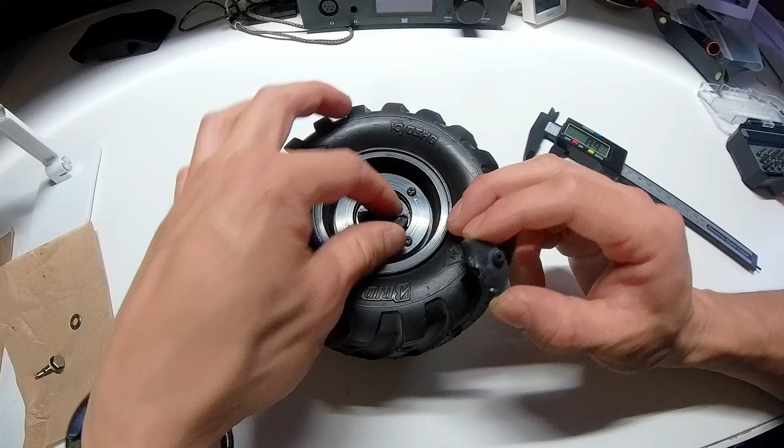I'm just gonna take some measurements of this wheel hex, and I'm still learning. I'm just starting to do some 3D printing and modeling, so I'm not a professional. But here's just a quick way how I do things.

So I'm just going to take out the outer diameter, around 28.4. Doesn't have to be that exact because there's some space in between each side. From what I remember, there's a plus or minus 0.2 millimeter difference for my printer. So I'm just going to put 28.4 in the computer so I can keep track of it.

And then for the width of the pin, I'm just going to do the width here and see the difference. So 12.2 versus the actual pin size is 12. So I can probably print the shaft to be 12.2, because if I do it exactly 12 like this pin, the hole might not fit it perfectly because you need some space for it to move around. And for a prototype, I don't want to make it too tight, and you can always adjust it later.

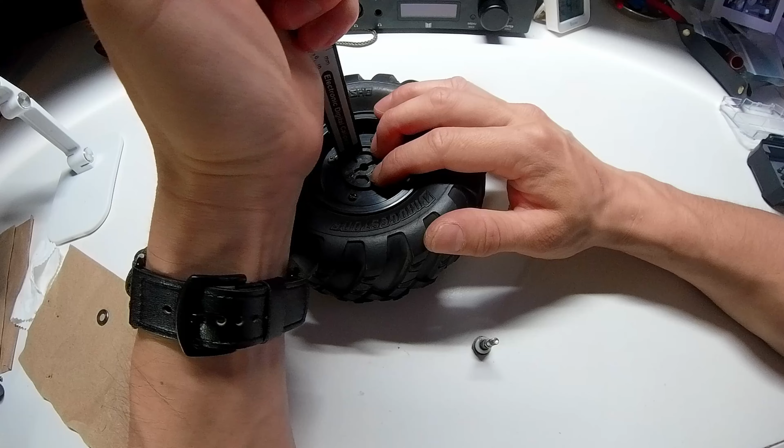And then now I gotta do the thickness. I'll use this part of the caliper at the bottom end just to check the depth. The depth is around 2.2, 2.4, and 2.4 is the depth. And then I'll check the actual thickness of this. It's actually 5, so if I do this here instead, yeah, it's around 5. So let's do 5 for thickness of the wheel hex.

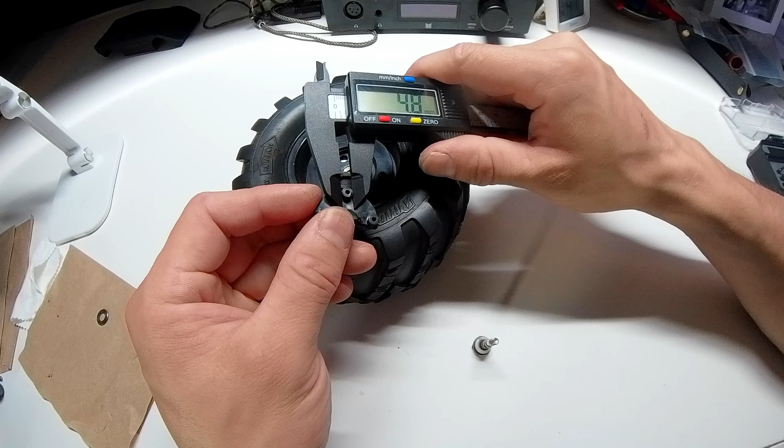In each individual wheel hex, I mean the legs, I don't know what to call them, but the attachment point to the wheel, let's measure that as well. This is the height of those 4 attaching points, so I would say 3.2. And then the width, the diameter, not the radius - the diameter is 4.7, so 4.7.

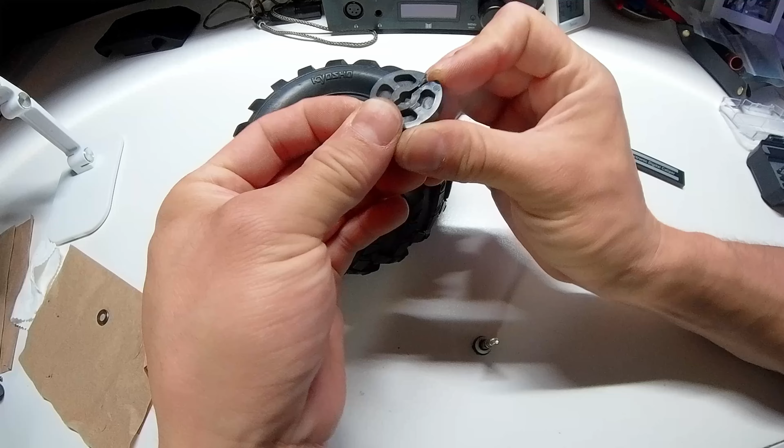So all these numbers are just estimates, and I think that's pretty much what I needed for this piece here. And I think I just need one more thing: how deep is the shaft?

Because it doesn't go all the way through for the center shaft, let me take the thickness of this. It's 2.3, so it's 2.3, 2.4 millimeter deep for this shaft. 2.4 deep.

So after all those are done, I used to use Fusion 360 when I was a student, and they have a 1 year free trial or subscription. So I used it for a little bit, but I wasn't studying 3D design or anything, it was just using that student benefit, like what I said about other benefits before. You gotta ask, and then you get it, and if you don't, then it's your own loss.

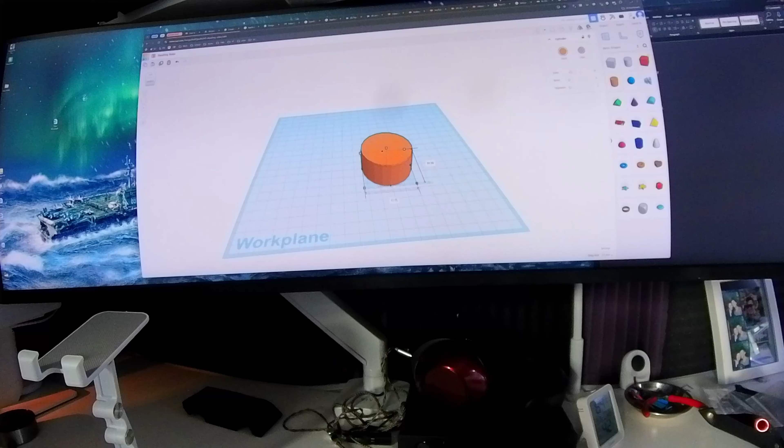And next, now I'm going back up here to my monitor, to my screen. I don't know if you can see it, let me turn on my lights now. So now I made some measurements of the wheel, and now I'm gonna go to Tinkercad. This is the free version, so most basic.

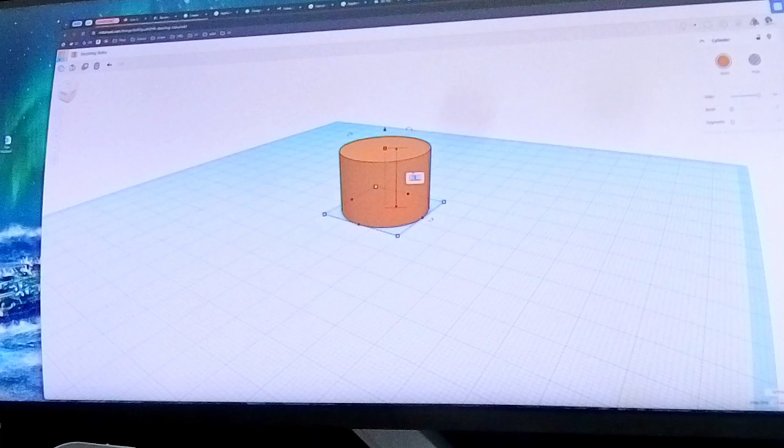I'm just gonna do a circle, 28.4 diameter on both, and then for the sides, it looks all rough, not like a smooth circle, and then we just do the sides and make it smooth as much as possible. Now it's like a smooth surface, and the thickness of this is 5.

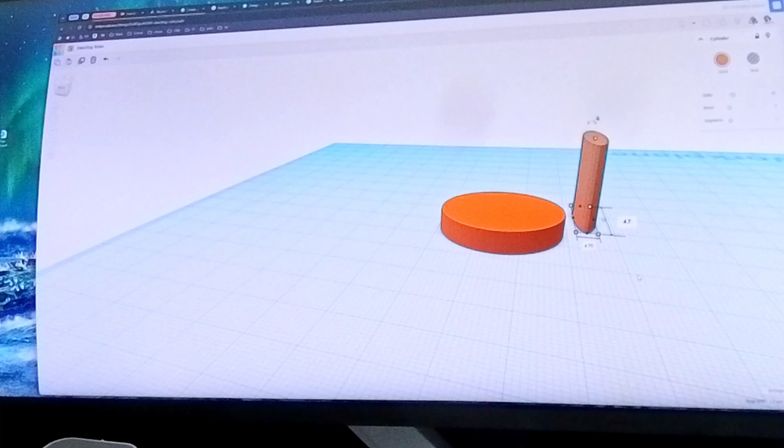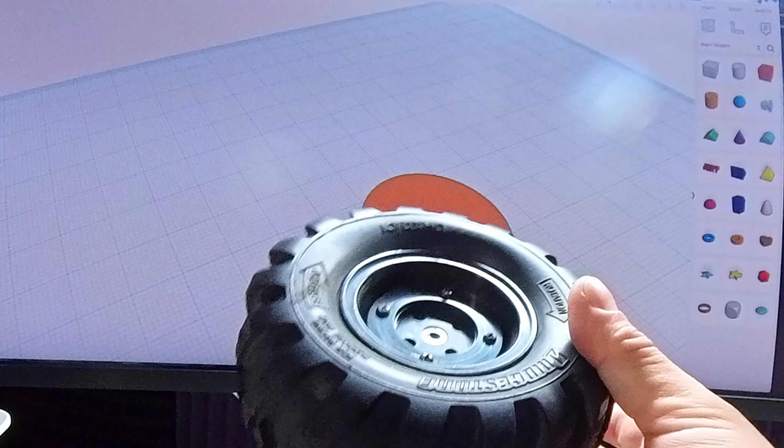So now you have this piece. It's pretty simple. And on top of that, you have to make 4 of those little legs, and I would just do 4 of those, same thing. And those legs are 4.7 by 4.7, and then the height is 3.2, and there you go, 3.2 height.

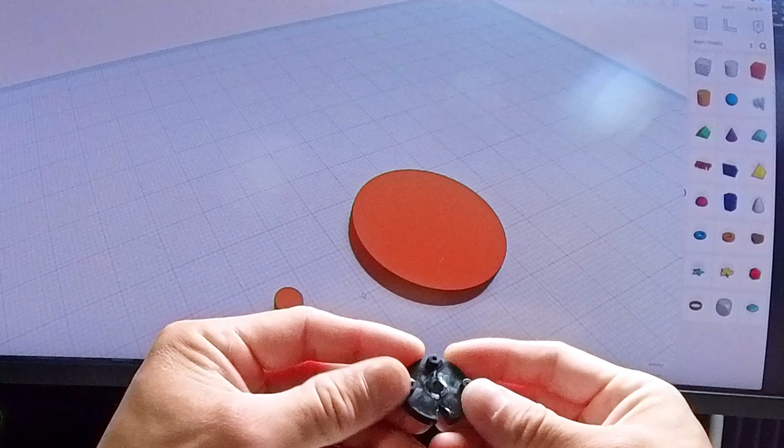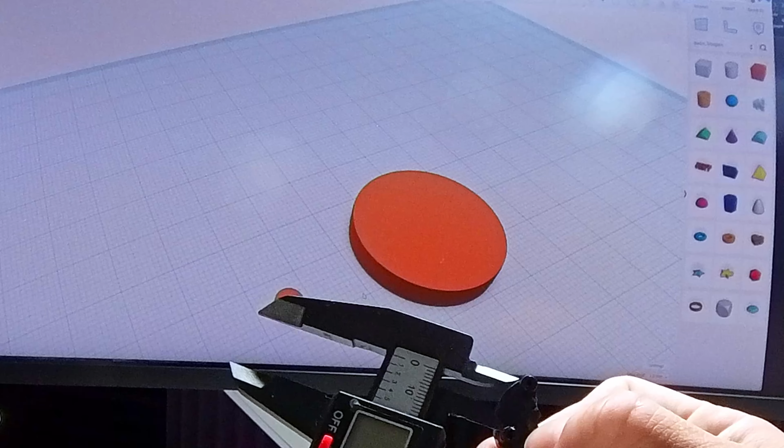And I think one thing I forgot to measure is, let me bring this back up, because now you need 4 of those, but where do you place them? So now I need to measure the distance for those legs. They are not perfectly on the corner. So I gotta take the original piece and measure how far off they are from each corner, because they're right at the corner, so you don't have to measure the space, but you can measure this distance.

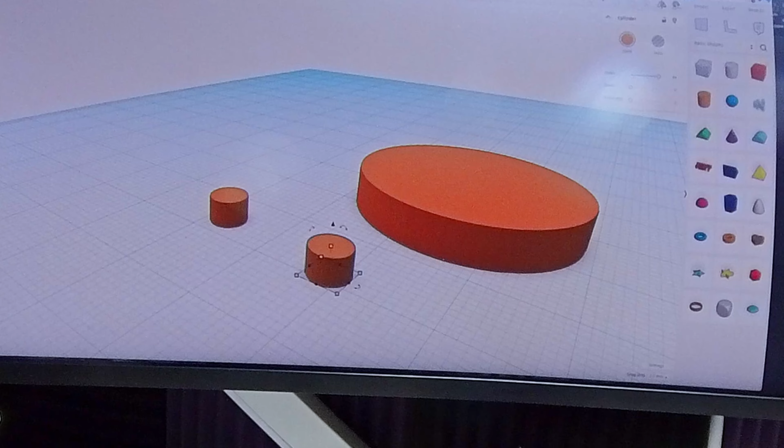Distance, center, I guess space is sufficient enough. Center to center, it's around 17. So I would say 17, center of the hole. Okay, so you can do that. But first, let's make sure I got this right. 4.7, yeah. So sometimes in the software they look pretty big, but they're not.

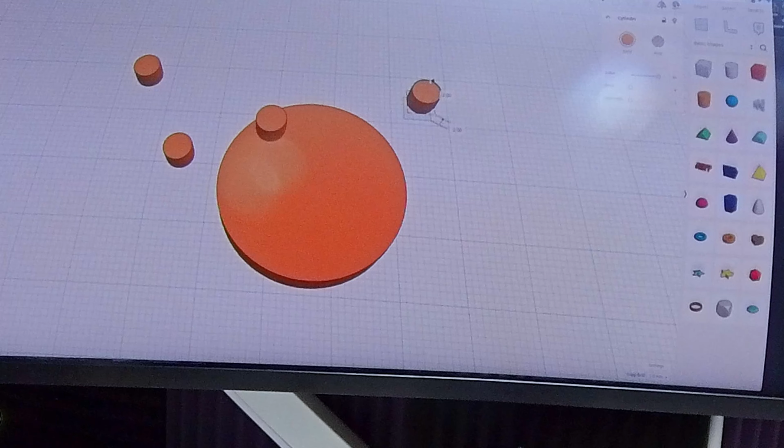So you need to make 4 of those. Control D, and 4 of those. I'm not very good at this, but you make 4 of those. And I think there's a better way to do it. If I put it at like 17. And you raise it. What is the thickness of this? 5, and then you raise it by 5. So now you can move this over here at one corner.

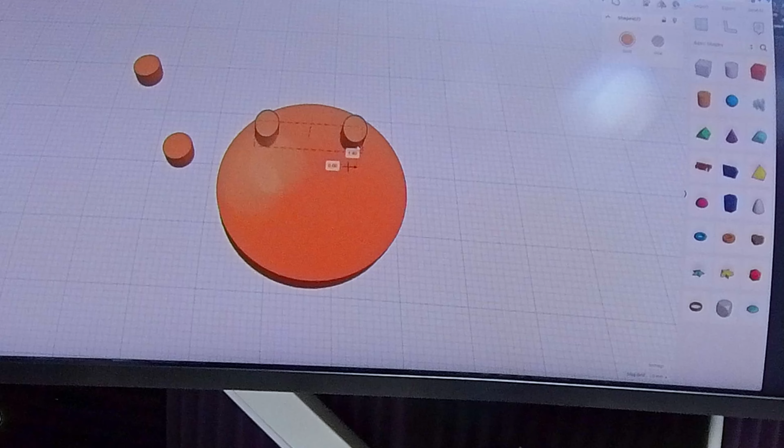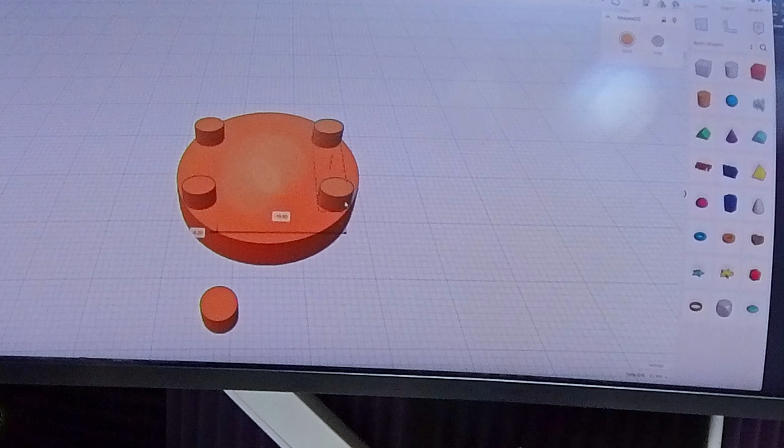And then you have to use a ruler to measure the distance to make it 17. Let's do 5 on this one too. So we just gotta make sure they're one end to one end. They're 17. They're not 17. See? Let's put 17. And then I think if you drag it on top, that's pretty much where you need to put it. Just align it to the edge.

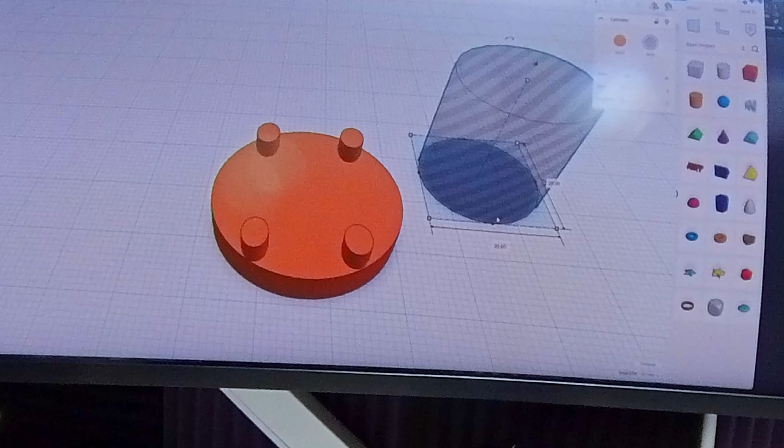We're at 1 millimeter per move. So I'm sure there's a better way to do this, but now let me do these 2 objects together. Control D, and then just line them over here. See, there you go. Now you have 2 of the same thing. And can delete those two. And now, looking pretty good. So now we have to cut a hole in the center, which is the shaft.

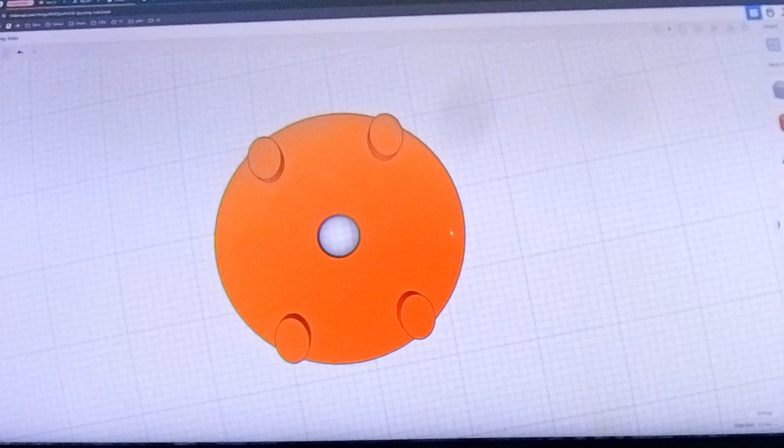It's 4.8, so we make it 5mm so it will have some space to move. 5 and 5. Lengthwise doesn't really matter. Let's combine those shapes first, done. And then I want to center these two pieces on those points. Now the shaft is right in the middle, make sure it's completely smooth too. And now you combine them again. So now you have a hole in the center for the axle.

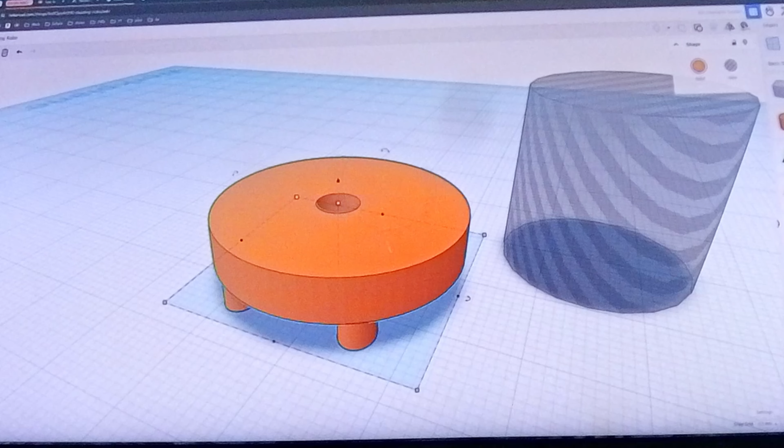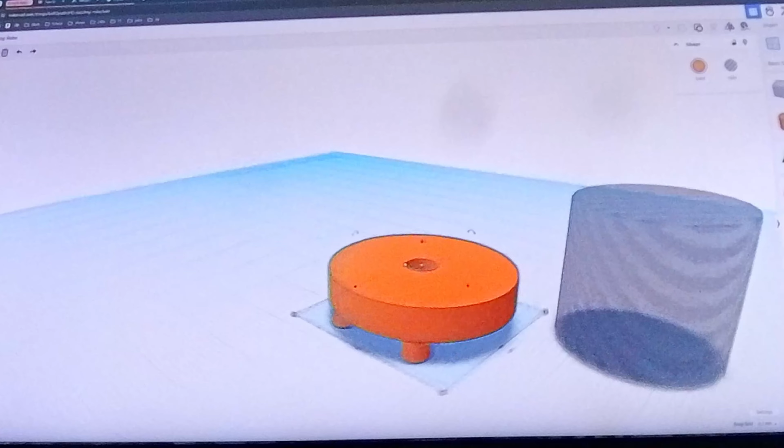Now we can turn this over 180. Now it's upside down. So now what we need to do is the cross shaft that goes into it. Wait, let me do this 180 again. I don't know if I made the heights of those legs correctly. Separate them completely. What's the height of this? Oh, that's correct. Never mind. So I went back and reversed it. Now it's back to the bottom end.

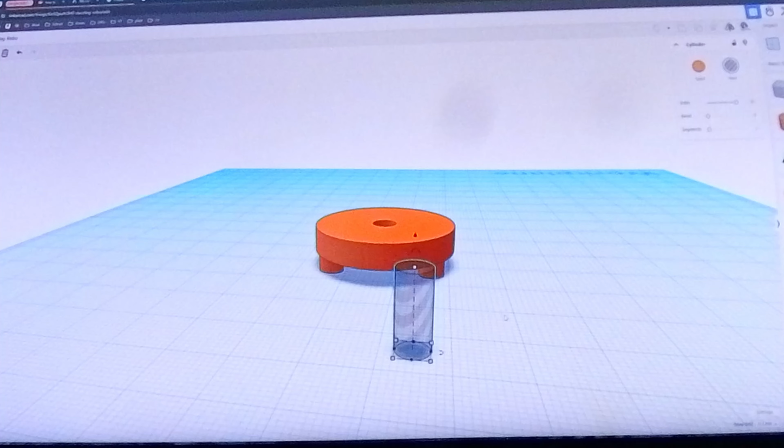So now let's focus on this piece. Make sure it is completely rounded out right here. The thickness of the shaft is 5, and the width is 12.2. Let's measure the actual piece first. Thickness is 2, so let's do 2.2. Width is 12. Let's do 12.1. Give you some space.

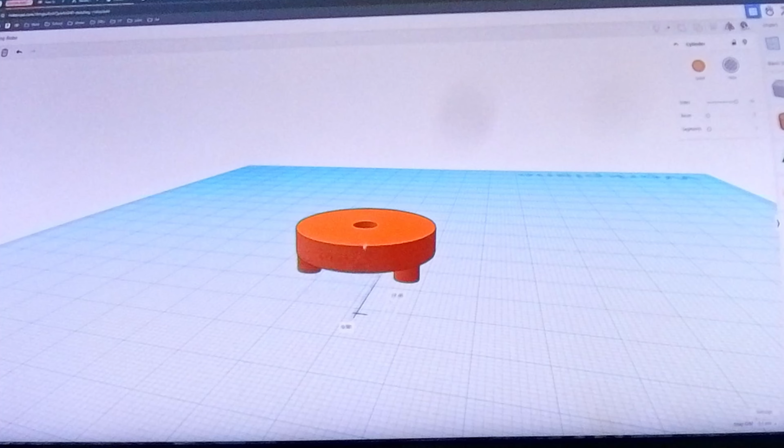Thickness is actual thickness. This is 2, so we make it 2.2. Width is 12.1, and that's pretty much it. And then we rotate it at 90 degrees.

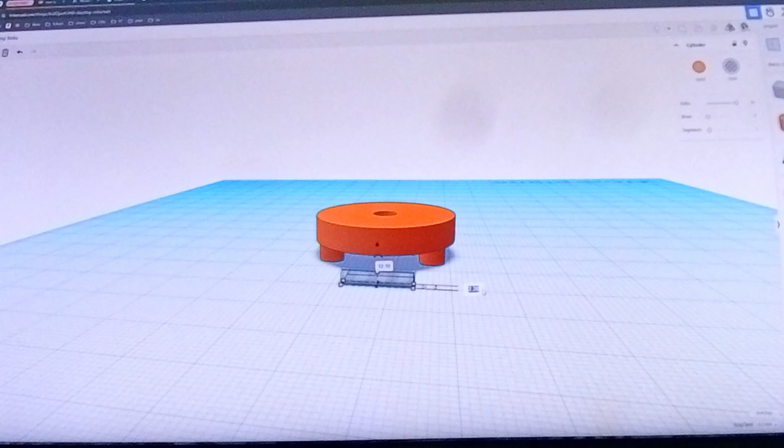And what's the height of this? The height is at 8... from this is 8.2, ground 2. So I just have to make sure. So this is at ground level. 8.2 is the actual height of the surface, and I need it to be 2.4mm deep.

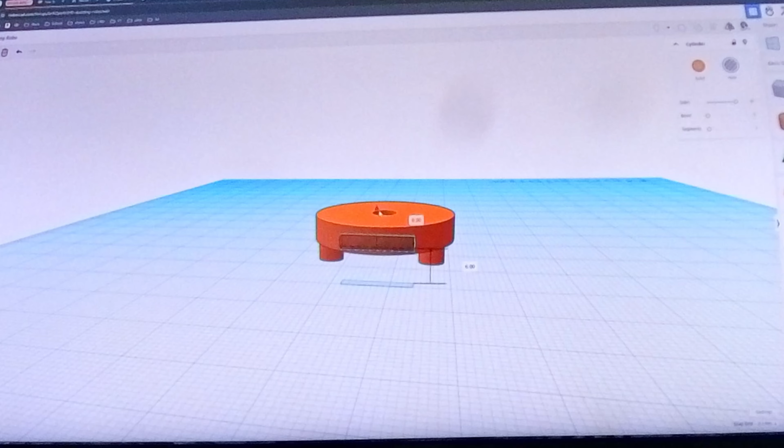So what I need to do is 8.4 minus 2.4, which is 6. No, 8.2, never mind, 8.2, not 8.4. Minus 2.4 is 5.8. So it has to be at 5.8 height. So I'm going to raise it by 5.8.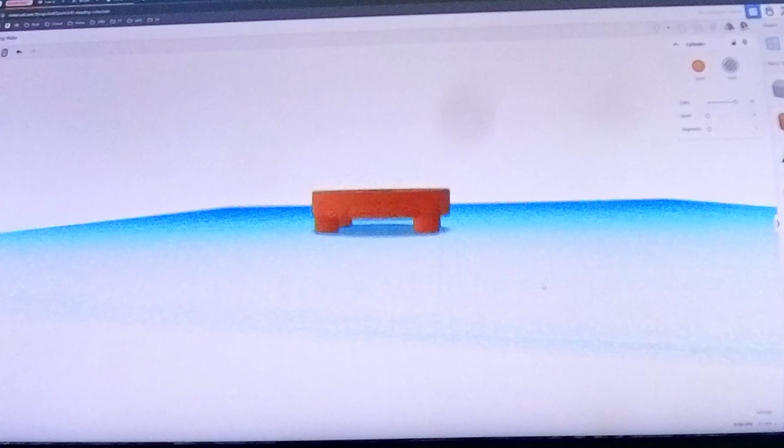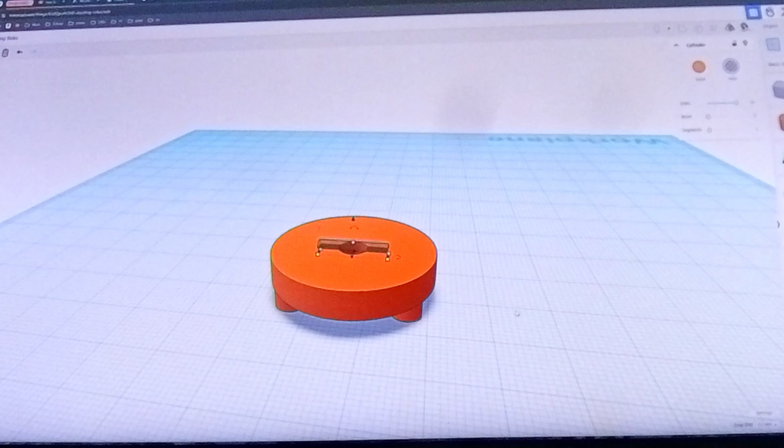And I can actually do it a little deeper just to be safe, because if it's too shallow, it might come out. So 8.2, 5.8, let's do 5.7, and it'll be a little deeper. And then now I'm just gonna align it with the center. So center, those 2 points. It feels like it's not showing up on the surface.

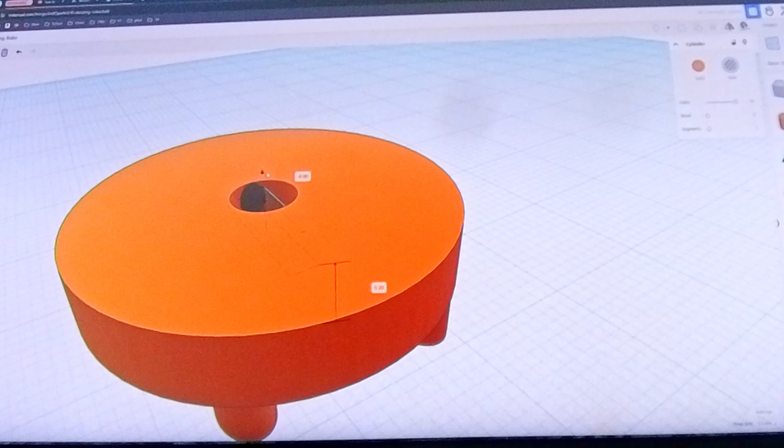Oh, I just remembered, the shaft, is it rounded? Actually, the top half is not, only the bottom half is rounded, so we can just do pretty much half of this. And we can do it a little thicker, like 3, then I can bring this down a little bit lower. So to do the proper math, you have to make it level. And if I do 3 and going down,

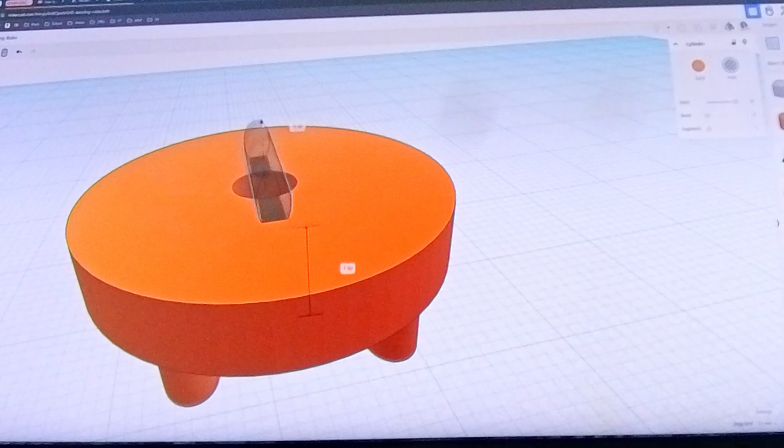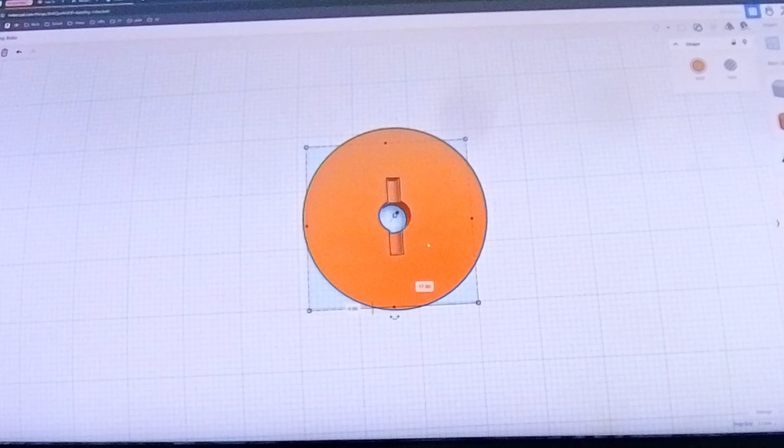so if I bury this and then go up, it'll be negative 1.4. Right now it's 0, completely submerged. So if I do half, it's 1.4. And the actual depth we need is 2.4. So I need to increase this by another millimeter. So additional, so we do 4. The height, and then we can drop this to 2.4.

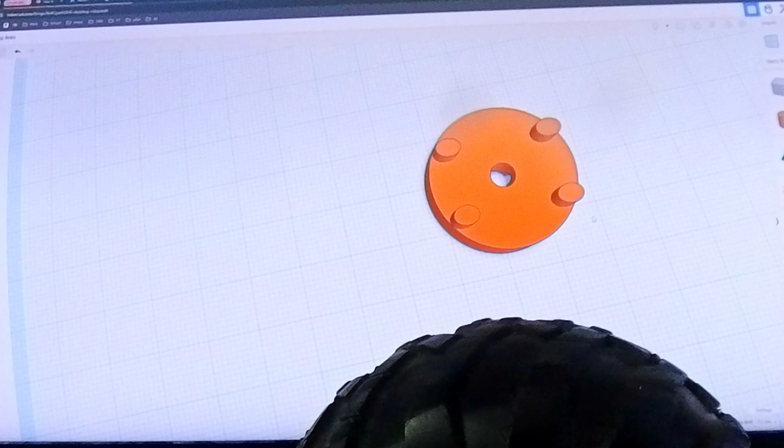Okay, now this is the shaft, looking pretty decent. So now we're gonna combine this again. Boom. Combine them, not separate them. See, now we have this piece. This is pretty much what the shaft looks like, and then the cross shaft, they're all centered. And bring this back 2.4 millimeters deep, and then rotate this 180 again. When I print this, I probably need some support for the hole. And then I'll just print it like this.

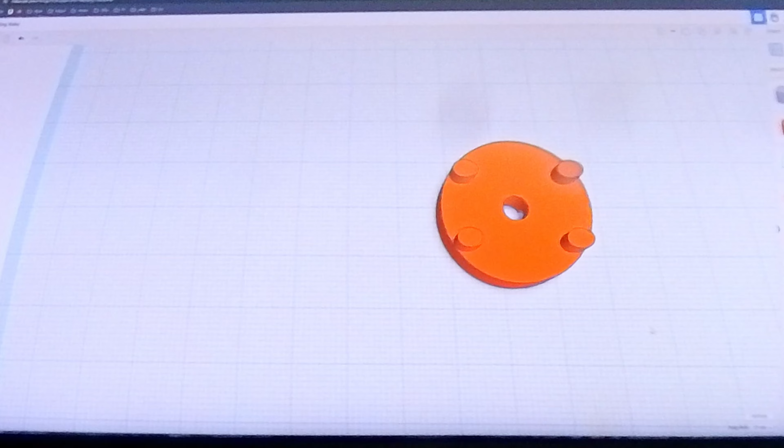And how does this look? So let's measure this. So this is the edge of this. The center. I'm just trying to get a couple more points to get a better reference of the placement of this, since I'm not very good at this. So 22 is the outer, and then the center is 17. And somehow this circle doesn't look too rounded, but I'll see.

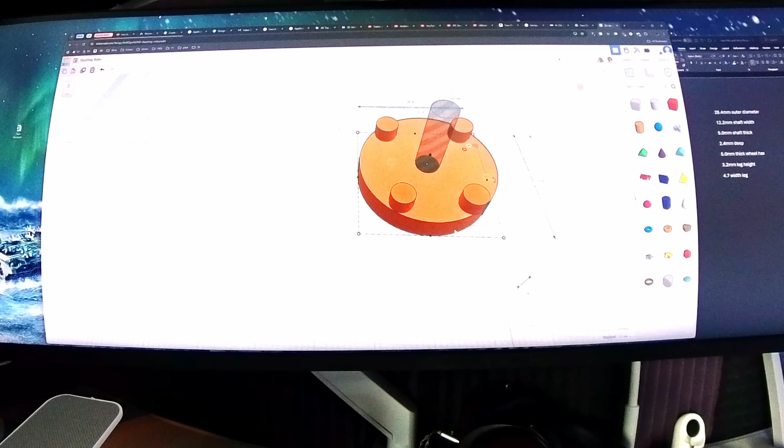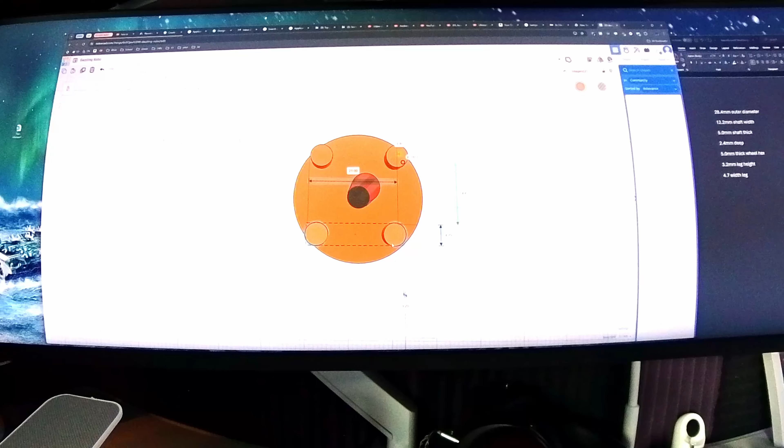Okay, so I'm just doing some little adjustment because when I moved it around, the size actually changed. That's why the circle wasn't really completely round. So I'm changing the units back to the actual units, and then I'm using a ruler to measure the distance of each piece. And now they're both 4.7, and the distance has to be around 17. I mean, technically I can delete this too because I'm just going to duplicate this.

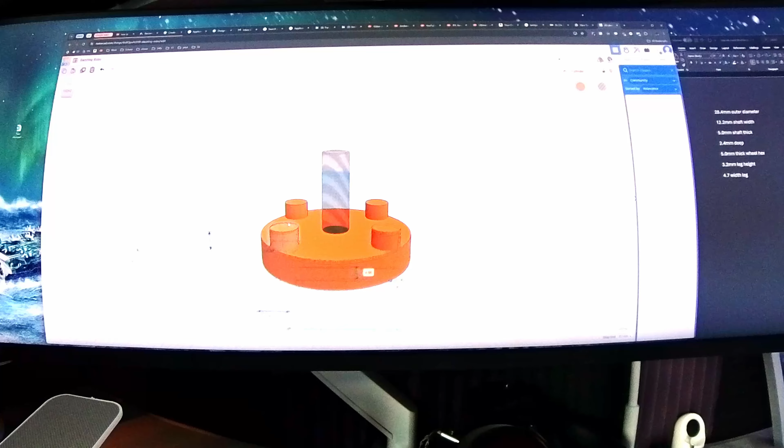Duplicate these two, and then bring them over. Because for that side, the width is good. So I'm just going to bring this back in a little bit. We have a millimeter. And then that's pretty much it for this piece here. They look pretty good. And I'm just going to combine all of them. And there you go. This is the wheel hex. And I'll print this out and see how it goes.